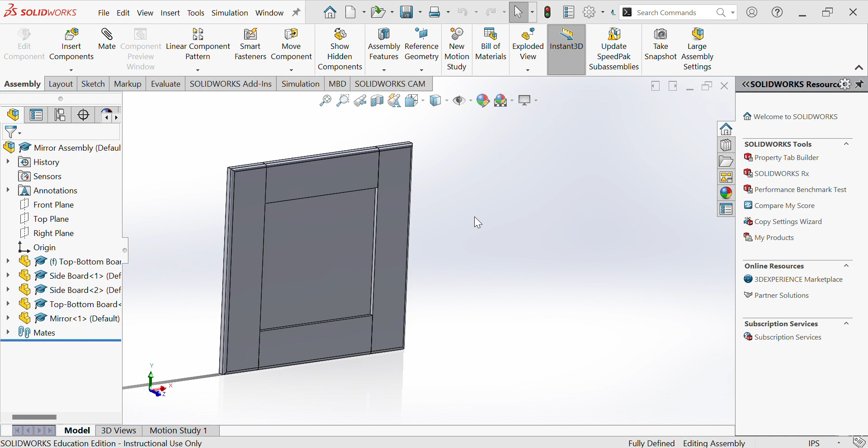To do so, you'll save it first, then go to File, Make Drawing from Assembly. They'll ask for your sheet format and size. I have a template already set up for my class. We'll hit Browse and navigate to your folder where I've told you it's saved. After you have the template selected, you'll hit OK.

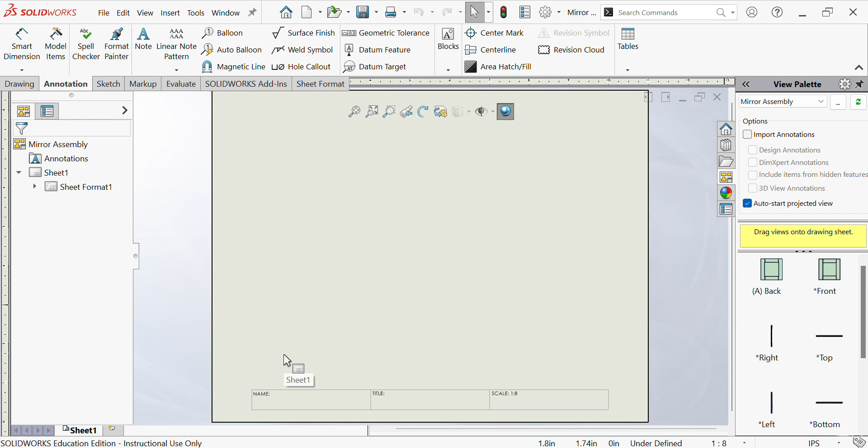On this one only, we usually put the front in the bottom left. This one, we're going to put the back in the bottom left. Left click and drag it over and release to place it in the bottom left.

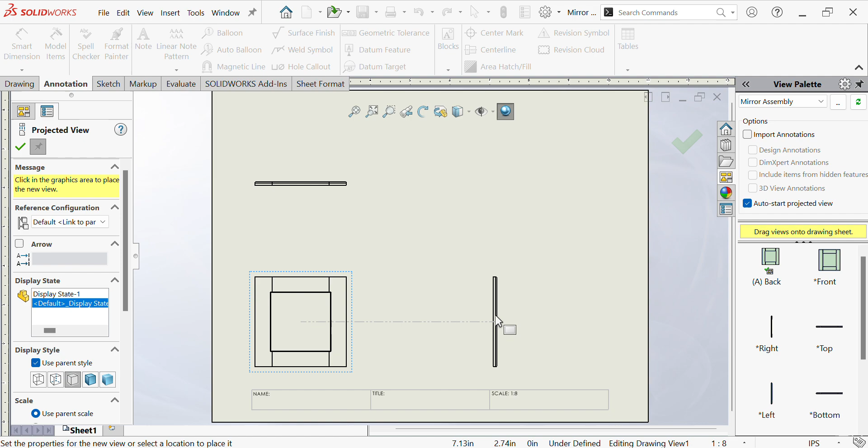Then we'll move our mouse up to get our top view and click, come back, move over to get our side view and click to place it, and then we'll go at a 45 to get our isometric and click. It will keep going and try to put different views in. You'll hit escape to exit that mode.

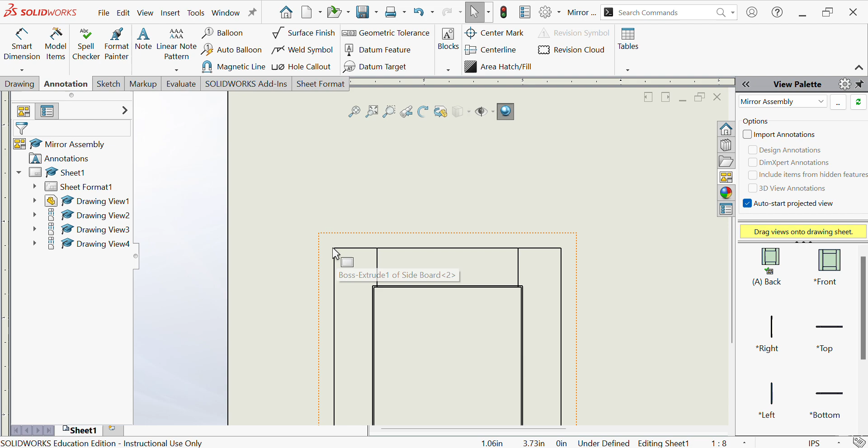If you didn't place your stuff in the correct locations, or too far from each other or too close, you could zoom in and go to a corner or intersection where two lines meet, click and drag. When you do that, you can see how the top and side view move with it, and the isometric does not.

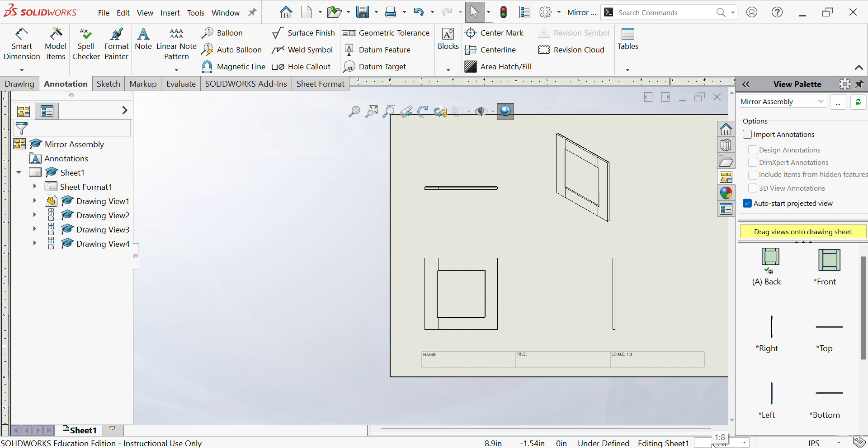At this time, we will make sure we have a ratio of 1:8, and we are now going to dimension this. Anytime we dimension, we make sure we have the overall dimensions for height, width, and depth. So let's do that first.

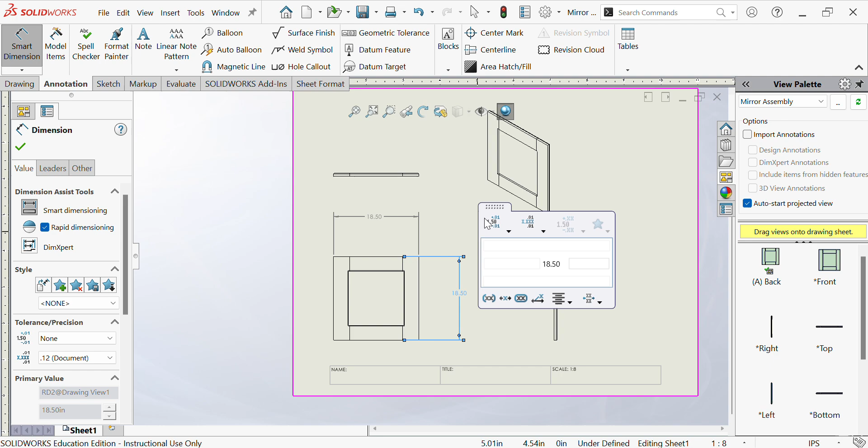My width from here to here is 18.5, and my overall height from here to here is also 18.5. Then I'm going to go to, it doesn't matter side or top view, whatever one you think shows more information. It's pretty similar. When you do this, make sure you try to line it up with your other overall views.

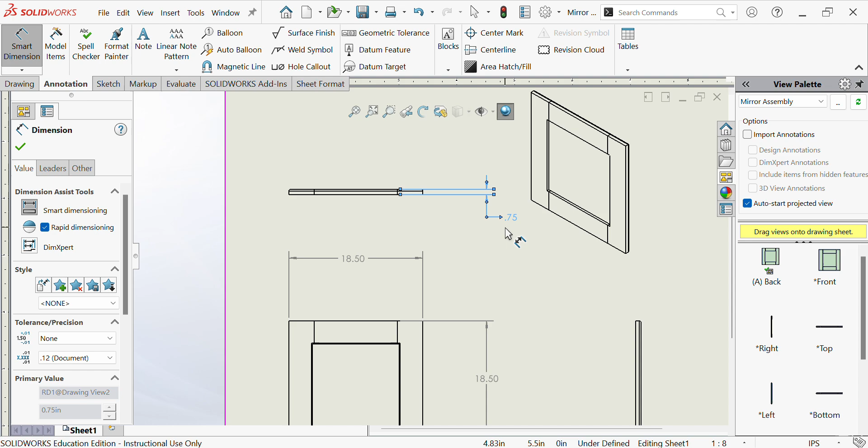I'm going to want my 0.75 to be lower because this little space here is too small to see my 3/4 of an inch. So I have my overall height, width, and depth.

Now I need to do a breakdown of all three. So I'll start with width, and I'm going to get this sideboard dimensioned. I'll bring that up, it will round up. It should be 3.125, but it'll round up depending on your settings in SolidWorks.

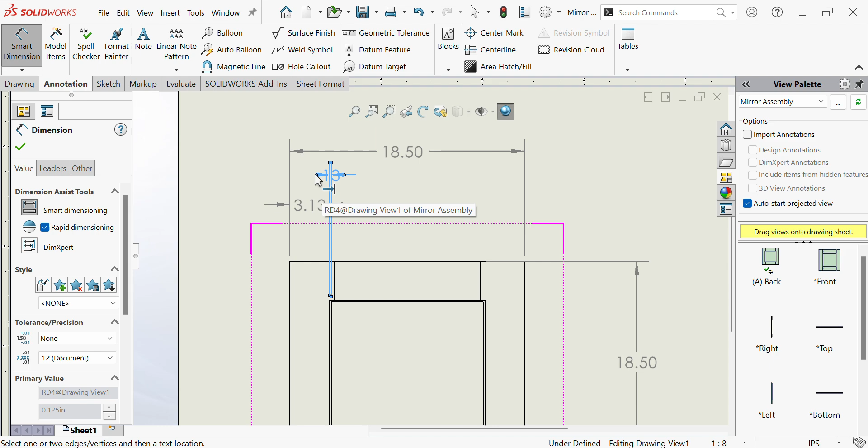Then I'm going to have this distance selected for my mirror and my frame. That will show as 0.13. When we have this, it's too small, so what we want to do is...

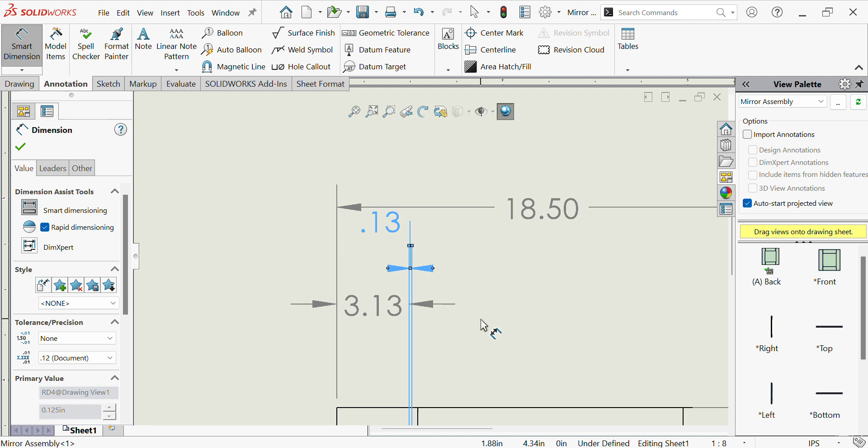Pop it out by using this toolbar, that way you could see what button you press to get that. Pop it up. And then one last one will be the total distance of your mirror, and you'll line up that with your previous mark. I had you pull this one out a little further just because of the size of it. Now my breakdown of my width is done.

I'll move over to my breakdown of my height. It'll be more of the same. I'll get that bottom board here, should be the same size. I'll do the distance from the mirror to the frame.

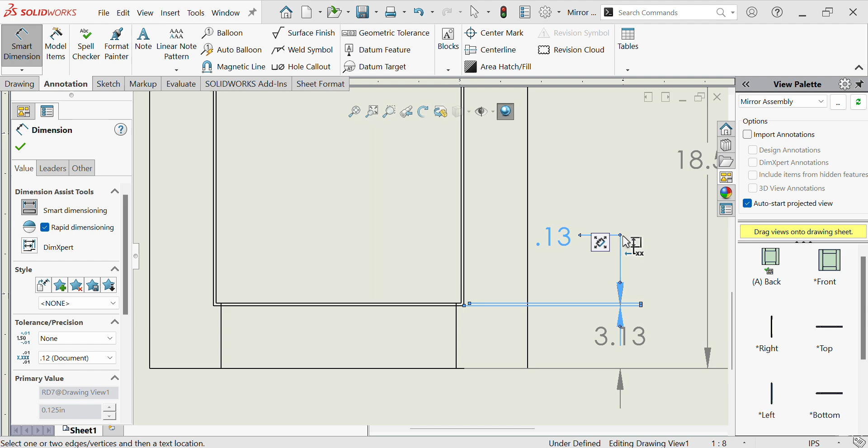You could click this little line right there to make it pop out and move where you want it. And then I'll do my mirror again, make it a little smaller so it fits.

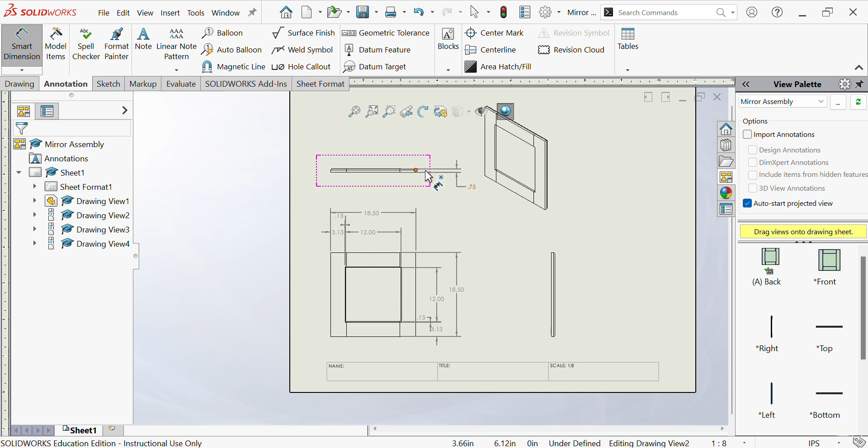When we finished our height dimensioning, now we'll look at our depth. There is nothing more to break down for depth. So at this point, you're done doing dimensioning.

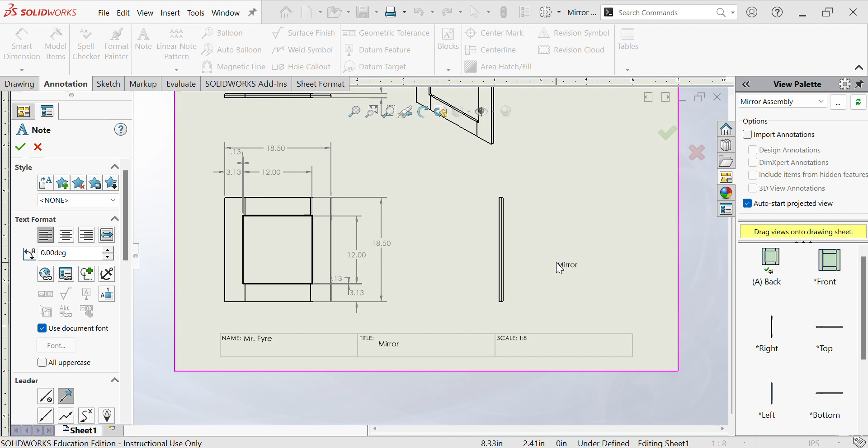What I'll ask you to do is go to Note, type your name, then again go to Title, and this is your mirror. And the scale should automatically pull up.

At this point, you are done with your mirror project, so you're going to want to make sure you hit File, Save As, and save that into your folder. Make sure when you save as type, it says SolidWorks Drawing, and file name's Mirror Assembly. You'll save that.

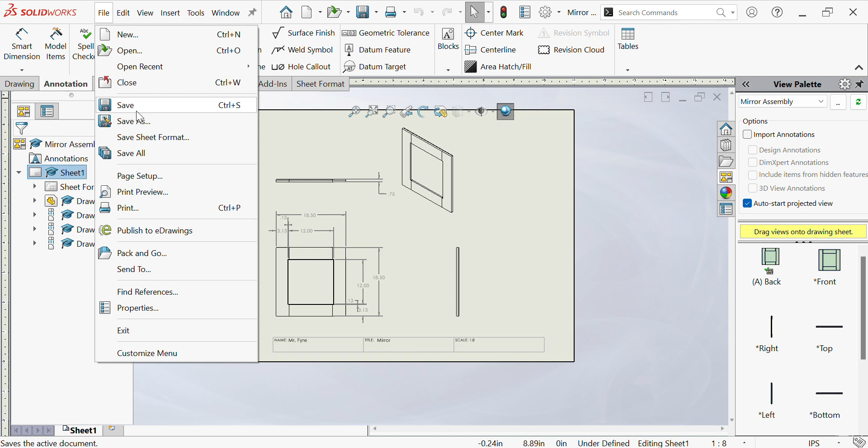After you've saved that, we then need to turn in a PDF into Schoology. So then we'll go again to File, Save As. You'll see the previous save. File name should be the same, but we're going to go to Save As Type. You must turn it in as a PDF, so you'll hit the down arrow here and select PDF and save.

That PDF is the page that you will turn in. Please do not turn in a SolidWorks file.